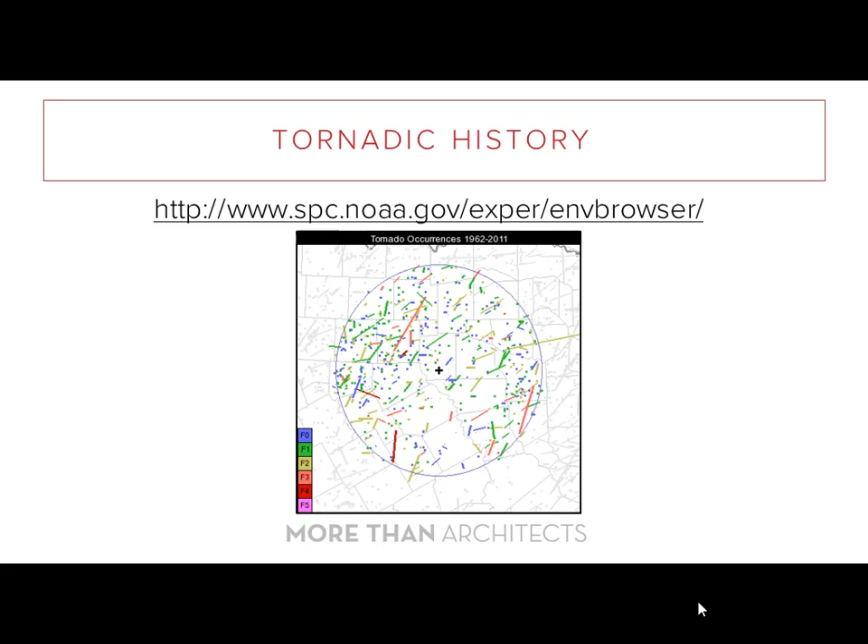FEMA is the one that sponsored these changes to the International Code Council for the IBC in the 2015 version. And in their justification, they referenced their history, and you can actually access it at this website for the last 50 years. It's very easy to use. You can just select the county where you are, and you'll be able to see over the last 50 years how many tornadoes have occurred and what types they are.

And the new requirement for schools is in its entirety on the screen in front of you. It's not very large. It says that Group E occupancies, which are educational occupancies, have to have a shelter for a 250-mile-an-hour wind speed per that ICC 500 standard that was referenced earlier, and that's for all of the occupants in that building. That's for anything with more than 50 people in the occupant load. There are some exceptions where you have daycare facilities, places of religious worship, or buildings that already meet the ICC 500 standard, but essentially those don't apply.

Huckabee, architects and engineers, all we do is K through 12 construction in the state of Texas. And we have 2 main offices in Dallas and Fort Worth. So this is something that affected us. It's very near and dear to our hearts, of course. And as such, I've become sort of a lightning rod for this issue as one of the major firms doing school projects going forward to try to resolve this issue.

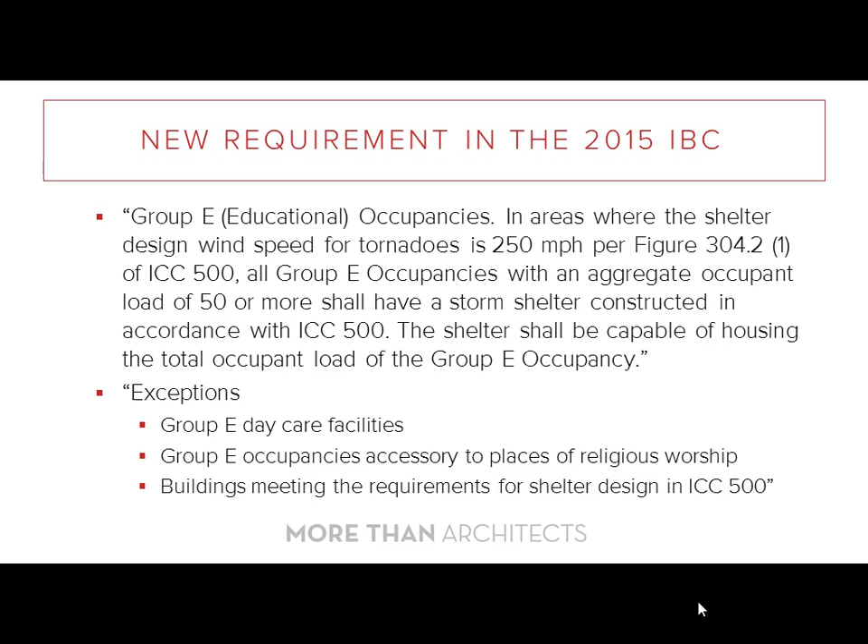As myself, a structural engineer who's got a background in geotechnical, construction materials testing, mechanical, electrical, because it involves all of those different disciplines, really they need to take a lead in the relationship with an architect as you develop the project. And I don't know how many structural engineers are in the room here today. Of course, the primary engineering firm in that discussion will be the structural engineer, because at the end of the day, you're trying to resist some very large forces. But it involves every single other discipline on the project in a very integrated, complex way.

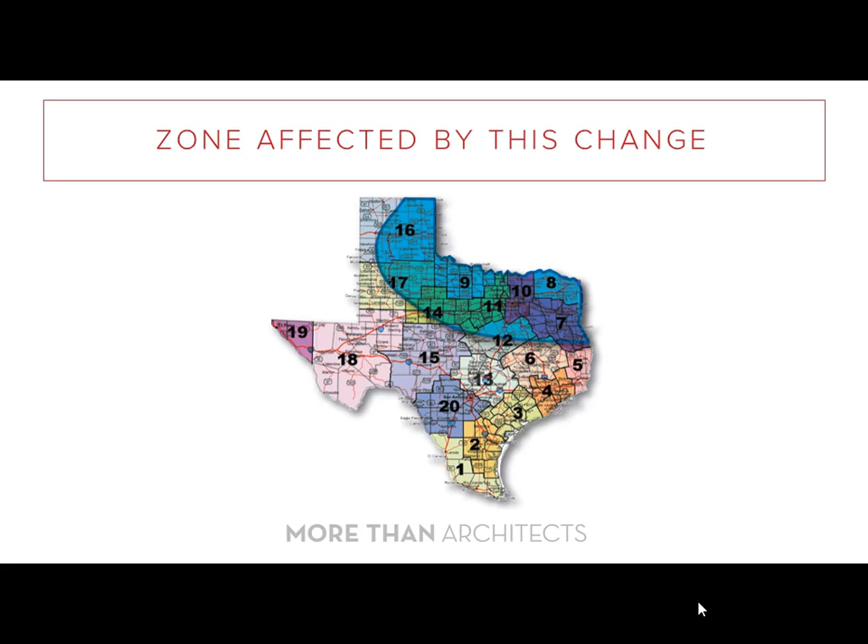The zone affected by this change is the darkest region you see on this map, and that is about a quarter of the state. The overlay of that map that we've done with the educational service centers show that all of DFW and other areas east and west of that would be affected. So when the local authority adopts the 2015 IBC, then you would have to have this for any new construction, such as a new addition to a school.

The document that's referenced by that language is ICC 500. This is not equivalent to FEMA P361, which is an older document. That was a guideline. It was published by FEMA, and that was not a mandatory standard like this is. So what that means is that if you look at designs done by architects and engineers across the country using FEMA's standard, there are many people who disagree with one provision or another, or they're unaware of certain requirements in ICC 500. And what I'd recommend is that you wipe your mind of anything you happen to know about FEMA P361, because it simply does not apply. So start over and look at ICC 500.

This document's very thin, very easy to read, and no matter who you are in this room, I highly encourage you to read it. And for those of you who are in the younger upcoming generation, I think this would be a great thing for you to read, because you're going to become more familiar with it with time than a lot of the people who are nearing retirement in this room, as we as an industry mature.

Some of the main construction requirements are shown here, and I'm going to spend some time on this slide to give you an idea. There's a minimum 5 square feet per person of open floor space, and it's actually 10 square feet if you're in a wheelchair. It says open floor space. That means a table, chair, storage areas don't count. And that's important, because that means that you might have to have 50% more area than this to account for those unusable floor areas.

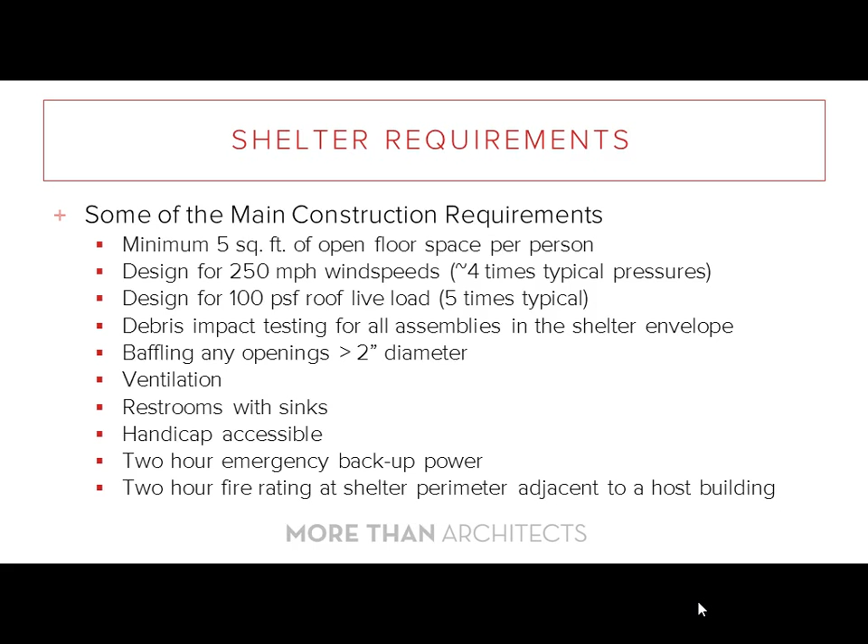Restrooms with sinks, handicap accessibility, 2-hour emergency battery backup, and a fire rating. Not firewalls. Firewalls have to stand up if the structure collapses on either side. We're talking about 2-hour fire-rated construction. And yes, I have had architects ask me if they can do a cantilevered firewall on one side of a shelter, and no, I did not allow that, and I don't recommend that.

One of the questions is, where do you put it? Ideally, for code compliance, from an engineering standpoint, we would love it to not have any doors or windows and be its own box in the middle of nowhere. But we've found that most people don't want to support use of tax dollars for a separate dedicated standalone shelter.

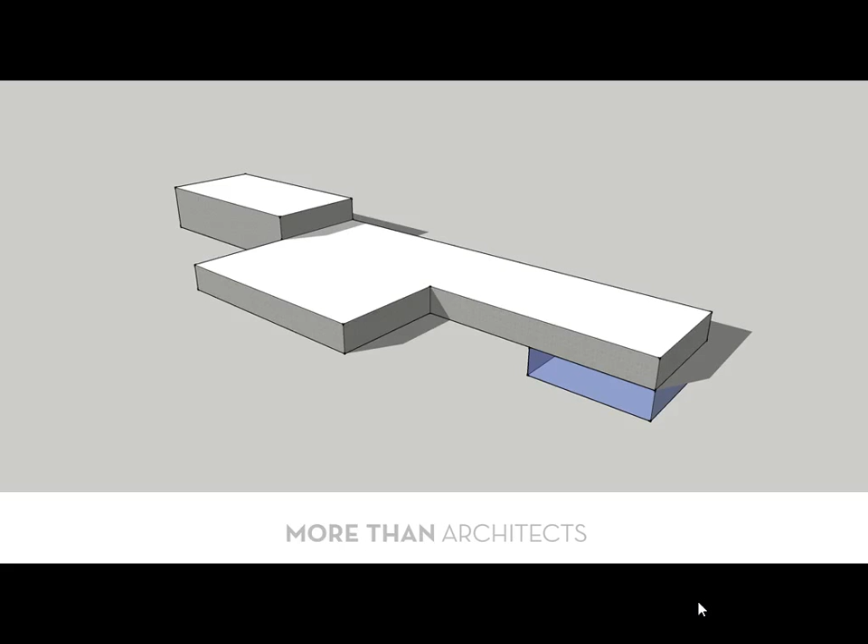You could use it as a basement. We found that that has its complications because of all the reasons that building a basement in Texas is a complication to begin with on any other structure. You have to have handicap accessibility, for one example. You have to control moisture. It has to be a habited space. So it's not like a crawl space in Oklahoma. 50 years ago, they would have just thrown kids in a crawl space if they had one. That is no longer considered acceptable because of all the other requirements.

You could do a multi-purpose classroom or a single-story building, and we have done these ourselves. We've designed 9 shelters that are ICC 500 shelters, and to my knowledge, that's the most that any firm has designed in North Texas. And the problem with the multi-purpose tornado shelter with a classroom is you have a lot of desks and chairs that you can't count as floor space for your shelter.

So what we found is larger open spaces happen to be more economical in the sense that the area of the shelter is smaller, but the cost per square foot of design and construction for larger open spaces is more. Structurally, it costs more to span an 88-foot span than it does to span with a grid line of columns at a corridor, 40 feet. So I think the industry will find its own solutions, but there are 2 flavors of shelters you find in the country.

One is precast gymnasium shelters, and that's what we are doing a lot of. You could also do insulating concrete formwork or concrete masonry classroom shelters, and we've done our share of those.

2-story elements are problematic because of fire egress, and even though it's not explicitly stated in the code, when your shelter is activated, a door becomes a wall, and therefore it becomes a dead-end corridor for anybody outside the shelter trying to get in in case you do not open that door.

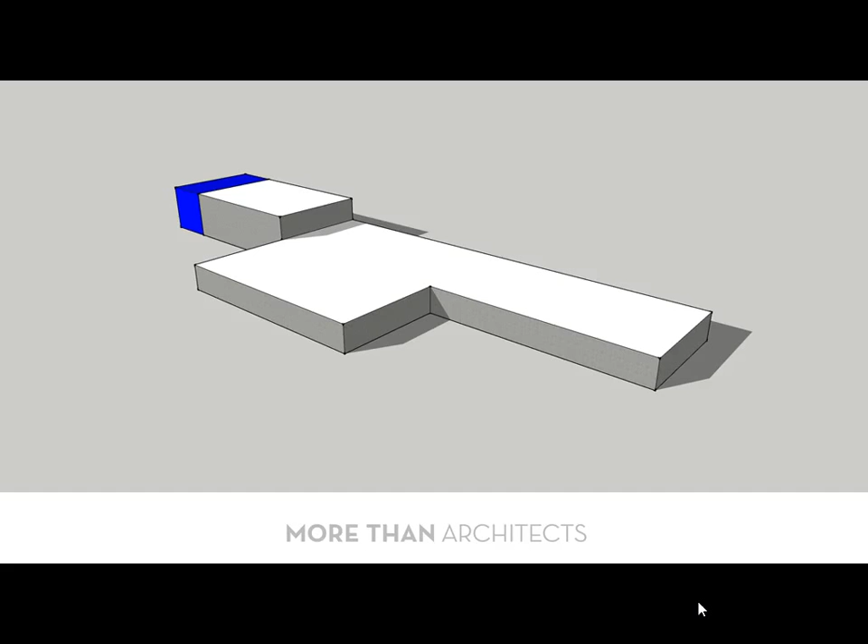And so you might start thinking about all the protocols involved, and no, the code does not give you any guidance on when to activate, on how far to place your students to consider them within an acceptable distance. It does not tell you who's going to be in charge of the shelter or who's going to have control of the shelter. All of those things have to be done by a local emergency planning committee, and we'll talk a little bit about that later.

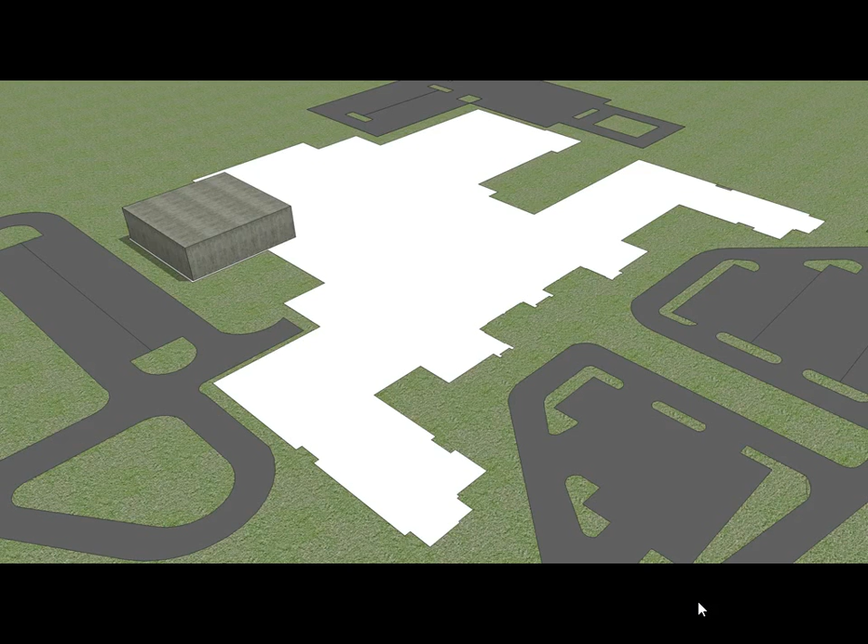From a broad visual standpoint, this is the West ISD new high school, middle school that Huckabee designed. I was the structural engineer of record on this project. And this is what the architect sees. This is what the owner sees. This is what the public sees. But this is what I see. You have to design a tornado shelter to withstand those loads, assuming everything else around it has been wiped off the foundation, and so you have to account for all of that.

The heart of a shelter is what I call the shelter control room, and that's not a name for a room in the code, but when you think about all the things that need to happen, it's convenient to have a place for them. So we have a control room. And in that we have, first of all, restricted access to staff only, and it's separate from the host access control system. And you have a book of protocols, training and maintenance log, activation switches, because there are a lot of things that need to be activated in a shelter.

One thing you need to activate is the system that would likely be closing off the ventilation during normal occupancy. Our owners aren't going to want to air condition the world, so a ventilation system is counterintuitive. It's not what you want in a regular building. So there has to be some way of shutting that off during normal occupancy. And that can be through a louver or a door, and you have to have a push-button control in the control room that will open that system so that the ventilation is free.

You have a lot of hold opens for permanently open shelter doors that need to be released. You have the locking mechanisms to lock them down. You have to have the activation for water pressurization tanks if you have a water storage tank to keep your bathrooms operable for 2 hours. Monitors for cameras. You have to have people that recognize within the shelter when there's a person outside the shelter. And right now we don't have doors with windows in them.

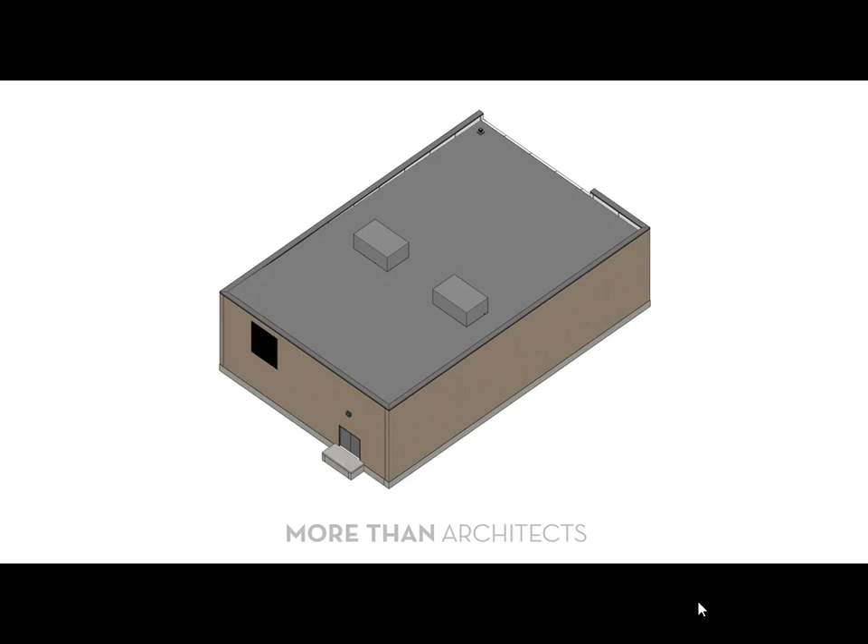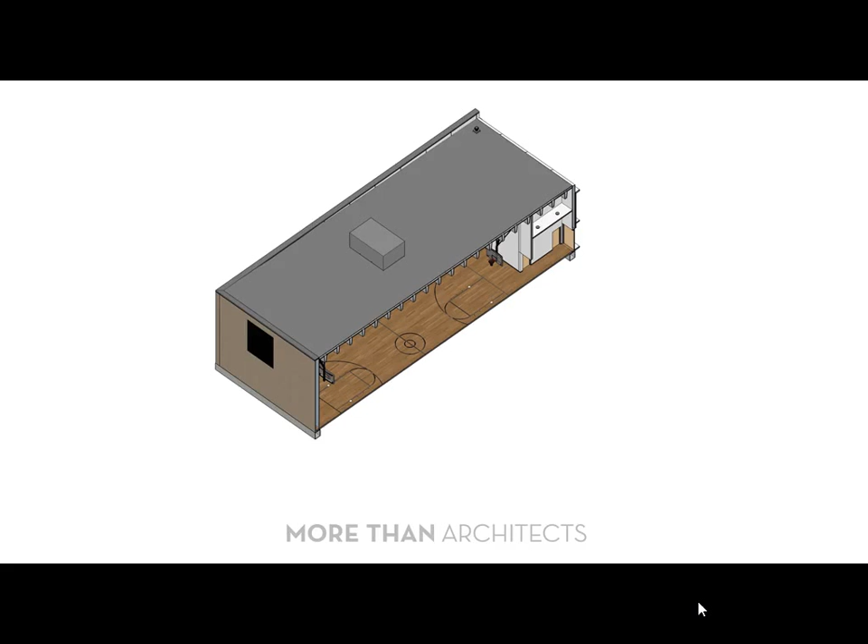This is an example of a cutaway showing a 12-inch thick precast concrete wall. That's not a sandwich panel. The brick veneer is sacrificial on the exterior. It does not have an insulation layer in between two layers of concrete, and that is pre-stressed. Double precast tees, something like 34 to 48 inches, depending on the span. And if you were to remove the top of the shelter, you'd see the rooftop units.

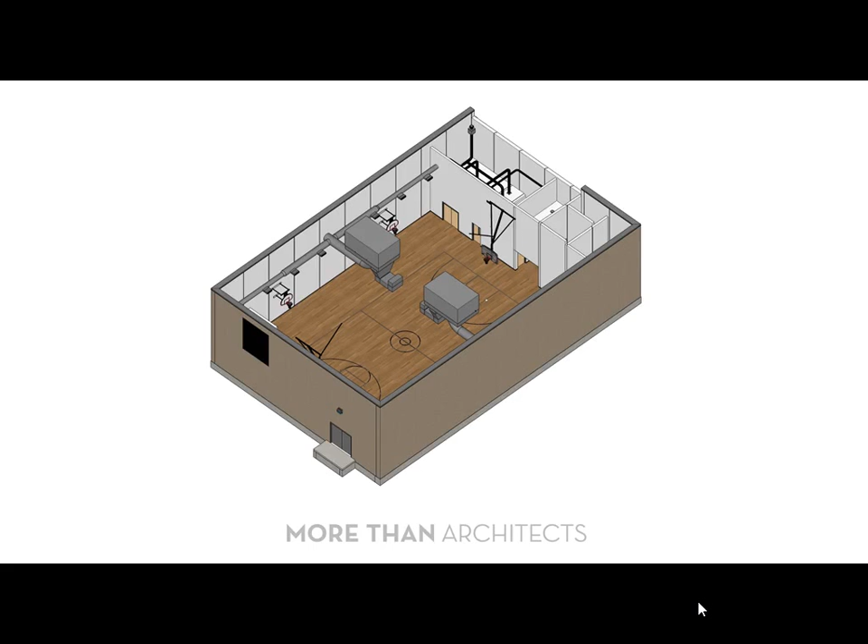Because those units might get sucked off during a tornado, we have baffling for the ductwork. These are the largest baffling systems on the job, and ideally, these are the only baffling systems on the job. If you can get all of the other disciplines to either do a 1.5-inch diameter pipe so that the penetration does not exceed 2 inches, or have them go down under the foundation and come up on the other side so it's protected by that 12 inches of dirt, those are viable ways of avoiding baffling. But if you have to have some kind of ventilation system for normal occupancy, you have to have some kind of opening that will need a large system. We use steel plates and tubes and angles.

If you look with X-ray vision, you can see that there's ventilation on the left wall where it does not have a baffling chamber, but it has two storm louvers that allow for double ricochet. If you look at the right-hand side at the back, you can sort of see a chamber, about a 10-foot by 10-foot room in which there's a lower opening, and the air comes in and has to come over an interior wall before it goes through a louver into the space up high. You don't want to have louvers into the room that are down low, because kids can get sucked into the grate with the enormous pressure changes.

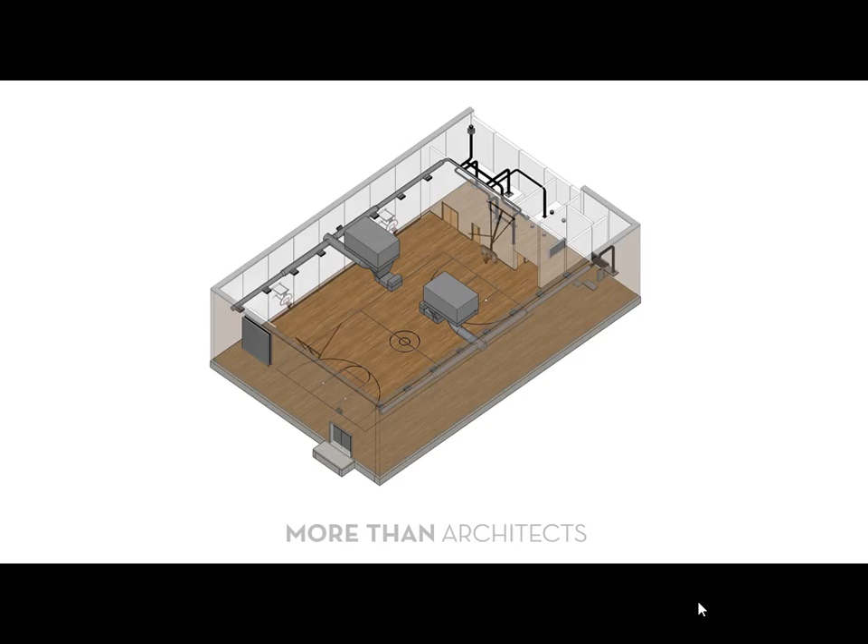One of the most complicated parts of a shelter is the baffling chamber for the lower ventilation that we do. If you want to work with your architects at the beginning of a project, you can find that there are many new relationships that many of them, other than Huckabee, are not used to working with.

First of all, there is a local emergency planning committee, and we are giving our clients the very brief reference to that term in the code, and we're helping them with their legal department. Most of them are establishing a local emergency planning committee by having the school board nominate and elect a committee to be in perpetuity with certain positions. So, for example, it might say the board president, the superintendent, and the chief financial officer of the district, whichever people are in those roles throughout perpetuity, for the planning, operations and maintenance of these facilities,

these tornado shelters. And you also have peer reviewers that are required, and unlike normal peer reviews, these peer reviewer reports have to go to the authority having jurisdiction as well as the local emergency planning committee. So this has a lot of teeth in it. And the reason is that studies have shown that many tornado shelters are not properly designed. So I would encourage you to work with peer reviewers early in the design phase if you haven't done a shelter before.